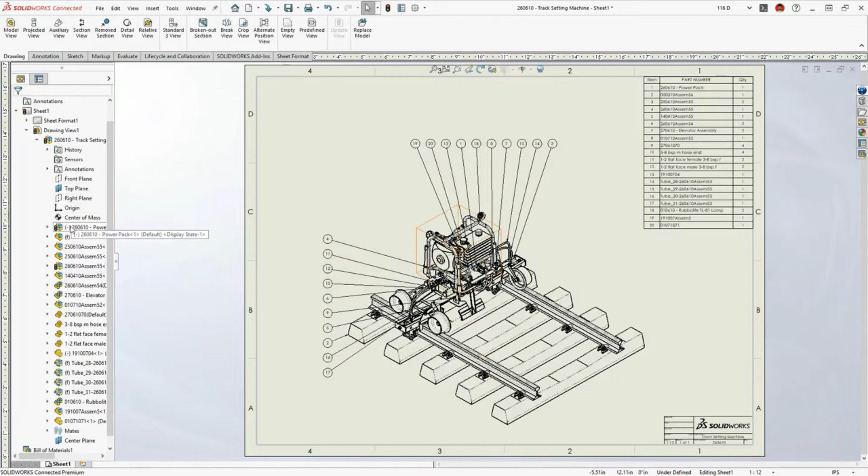You can now open the associated drawings of parts and subassemblies right from within a higher-level drawing. Whether you select from the Feature Manager, from a table, or directly from the graphics area, this will help you navigate a product structure without having to locate or open the reference part or assembly models.

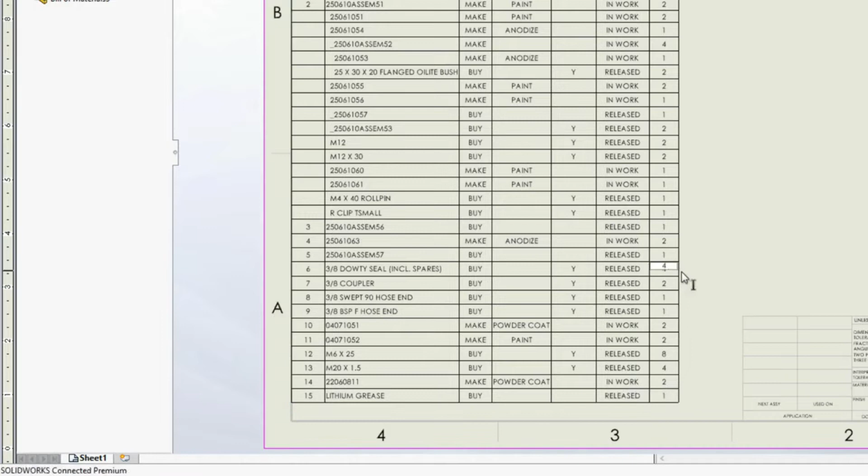It's common to make manual overrides to a bill of material table, but how do you know which cells have been modified? Now, when a table is selected, any overridden items display with a user-defined highlight color, possibly preventing a costly error. You can restore original values individually, by row or column, or reset the entire table at once.

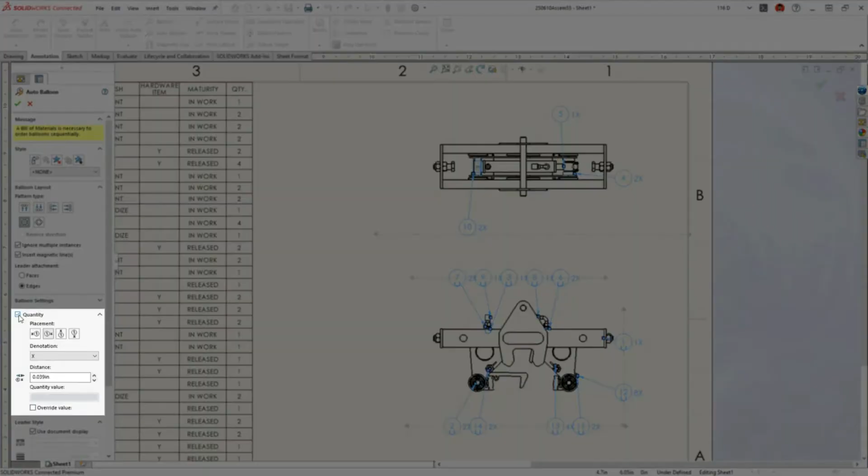Auto balloons can now show quantities outside the balloon. This option was previously only supported for manual balloons. This enhancement improves automation and provides greater formatting control when detailing assembly items.

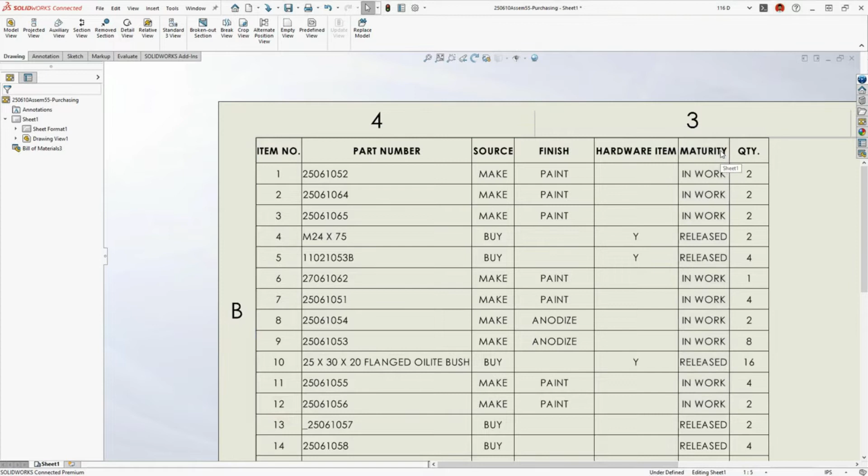New for 2023, the bill of material can be filtered with familiar spreadsheet-style controls. Icons in the table header indicate where filters are applied, and they can be removed just as easily. The integrated search bar narrows down a lengthy column of values, and custom filters can be defined with conditional logic.

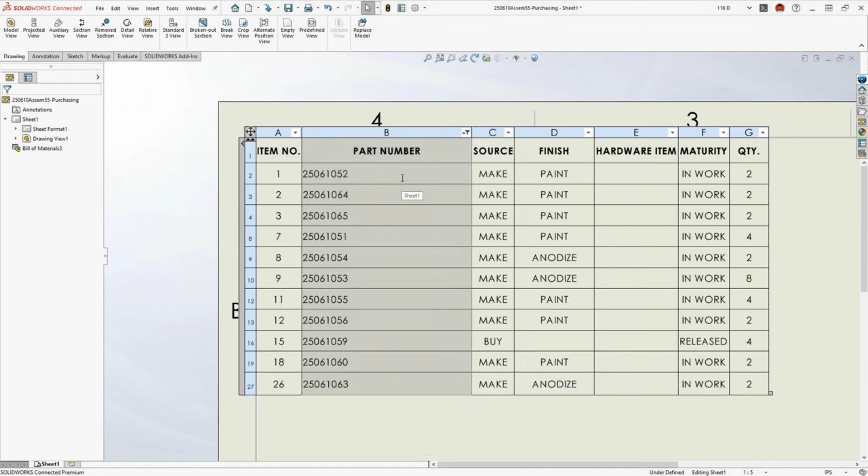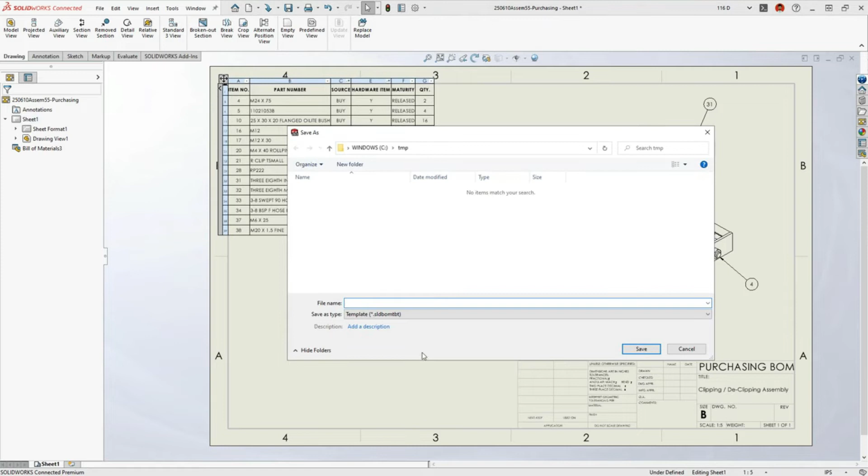Say you need a custom bill of material, such as a parts list of purchased hardware. Your filter criteria combines across multiple columns. Just like you'd expect, any existing auto balloons update to match the filtered table with no manual editing required. The resulting table can be saved as a template, so you can create and share on-the-fly tables that extend the utility of your drawings.

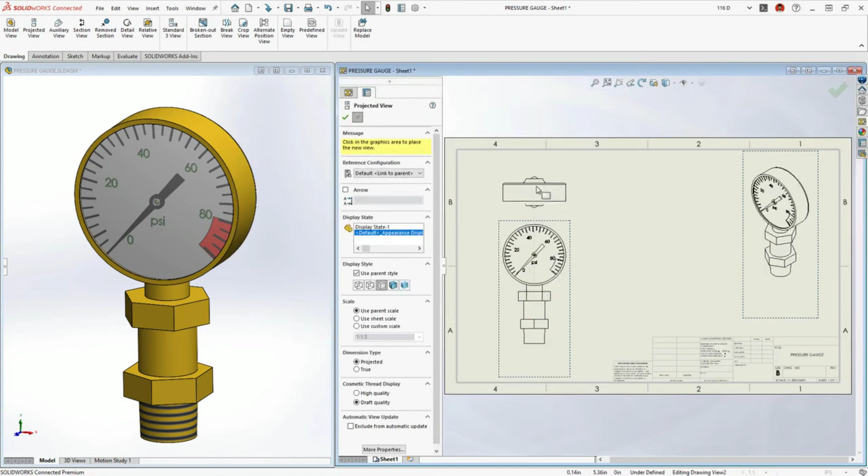Visualizing transparent objects in a drawing view just got easier with a new detailing option to see through transparent components or bodies. This can be enabled on a view-by-view basis, or set as a document-level option that will apply to any newly added views. Anything behind a transparent object will be shown with visible edges, so you can create drawings with even more detail and clarity.

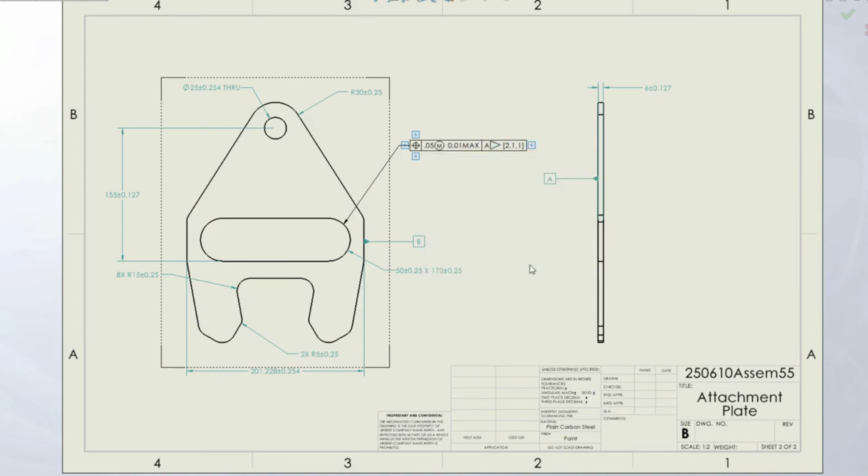Complete and accurate documentation is essential to getting your designs built right the first time. Enhancements to drawings in SOLIDWORKS 2023 will help you accomplish your detailing tasks faster and communicate your design intent even more effectively. And with SOLIDWORKS connected to the 3DEXPERIENCE platform, secure cloud data management is built in, so your most critical information is always up to date, accessible, and ready for your team to engage with. All of this puts you that much closer to the perfect.